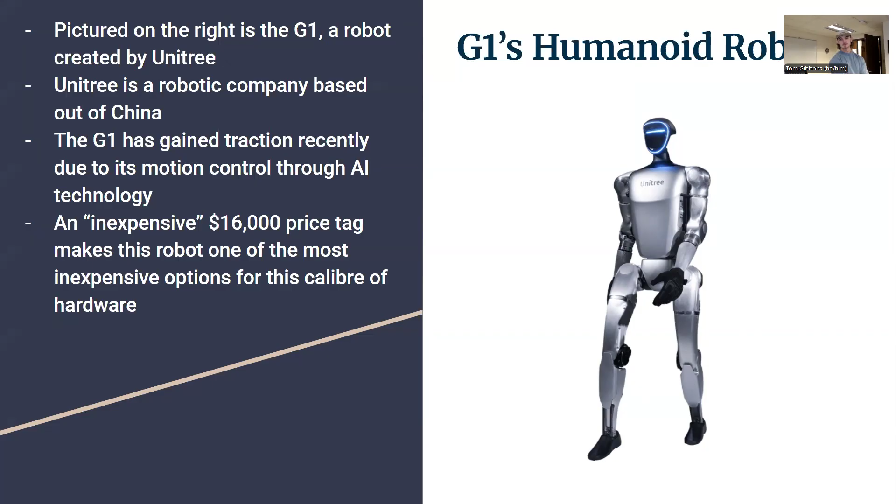The G1 has gained traction recently due to its motion control through AI technology. An inexpensive 16,000 price tag makes this robot one of the most inexpensive options for this caliber of hardware. There are some quotes there too, because 16 grand is obviously not inexpensive, but for a very sleek, functional humanoid robot that could be in your house and perform tasks, it's fairly cheap.

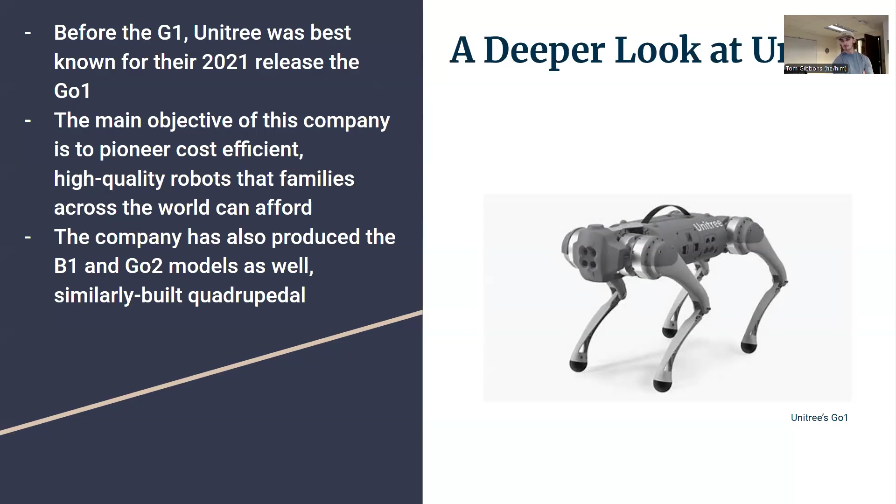Before the G1, Unitree's best known release was the Go1, this quadrupedal robot on the right. The main objective of the company as a whole is to pioneer cost efficient, high quality robots that families across the world can afford, bridging the gap between robots and affordability. The company has also produced B1 and Go2 models as well, which are similarly built quadrupedal, dog-like robots.

So the G1 was designed to be compact and light. It has 23 degrees of freedom, meaning that the robot has 23 different independent ways it can move. With these 23 degrees of freedom, it's able to walk, dance, and interact with its environment appropriately, able to navigate its surroundings.

So it's weighing in at about 40 pounds. If you can lift 40 pounds, you should have no problem carrying him around wherever you want, maybe to the park or maybe to grandma's house. He's 33 inches tall. Once again, he has 23 degrees of freedom, 7 of those degrees of freedom are within his arms, so he has a lot of motion in his arms. And then he has vision-based AI sensors. Once again, he costs around $16,000.

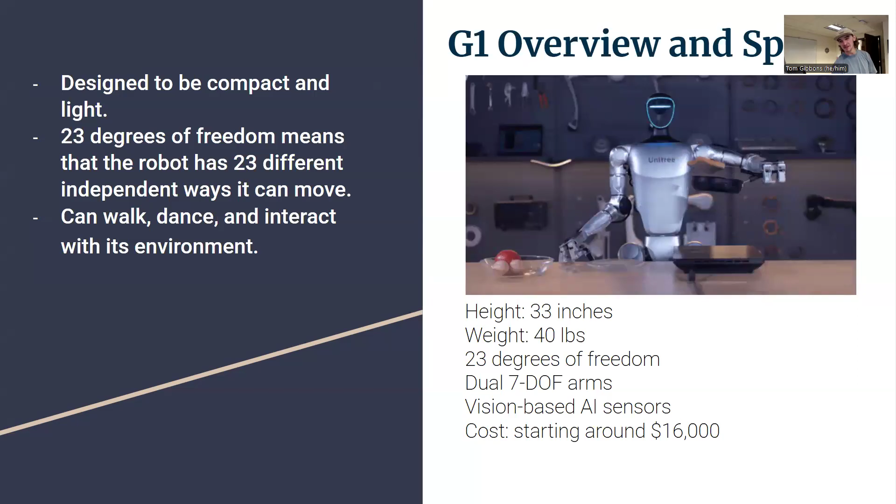33 inches tall, that's what we found online. Yeah, there's no way that's right because he's about human height. So yeah, he's got to be probably... yeah, that's completely wrong. He's got to be definitely taller than 33 inches.

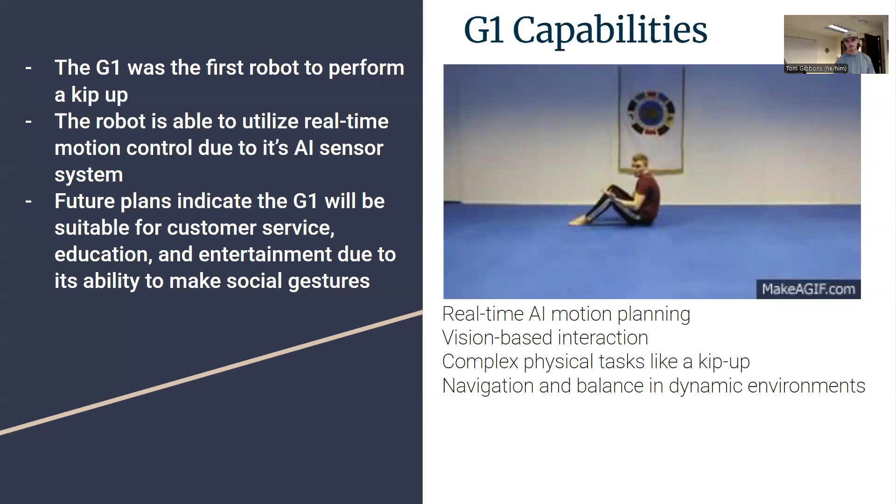One of its landmark features was that it was the first robot able to perform a kip up, which is this action being performed over here. It was able to do this because it could utilize real-time motion control because of its AI sensor system. Future plans indicate that the G1 will be able to be used for things like customer service, assisting in educational settings, and entertainment due to its ability to make social gestures.

I guess additionally to the kip up, they were testing it and able to kick it in the back really hard, and it's able to recover without falling over. So I thought that was pretty cool.

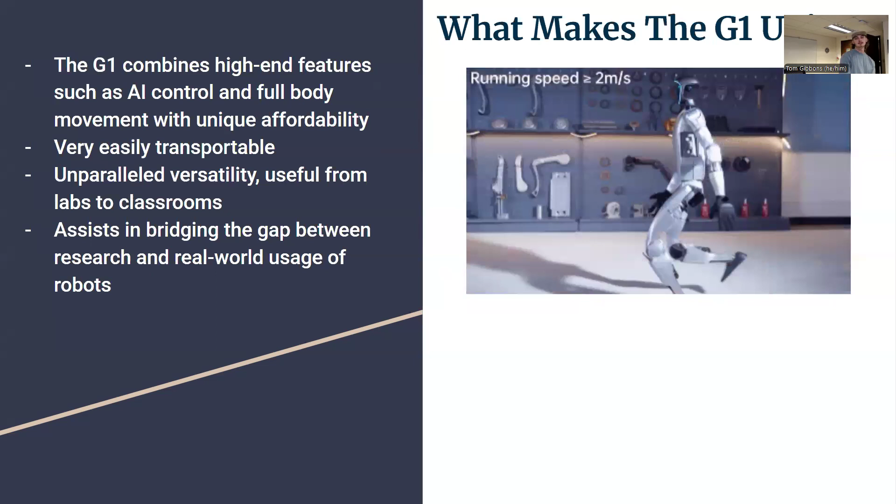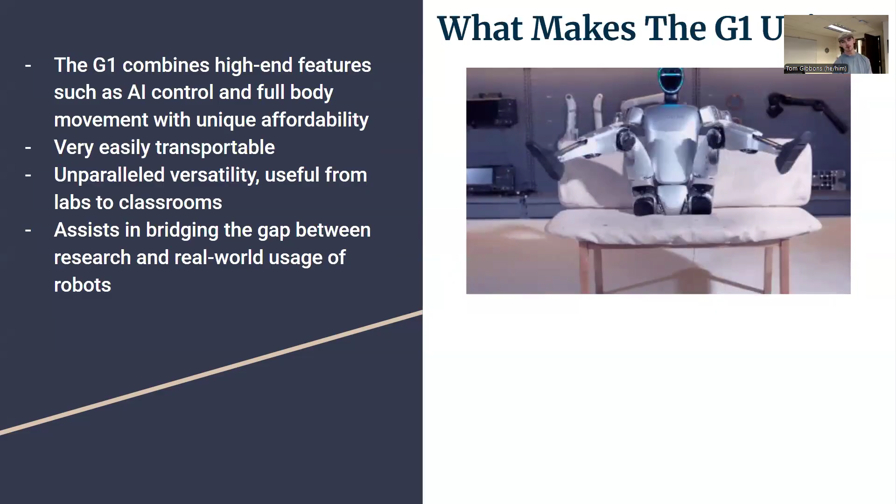So moving on to what makes the G1 unique. The G1 combines high-end features such as AI control and full body movement with unique affordability. It's very easily transportable, pretty light, and has unparalleled versatility, useful from labs to classrooms. If you were studying or coding or working with this in the classroom, it'd be easy to carry around.

And it assists in bridging the gap between research and real world usage of robots. So it's kind of affordable—we're maybe going to be able to have these in our own homes in the future.

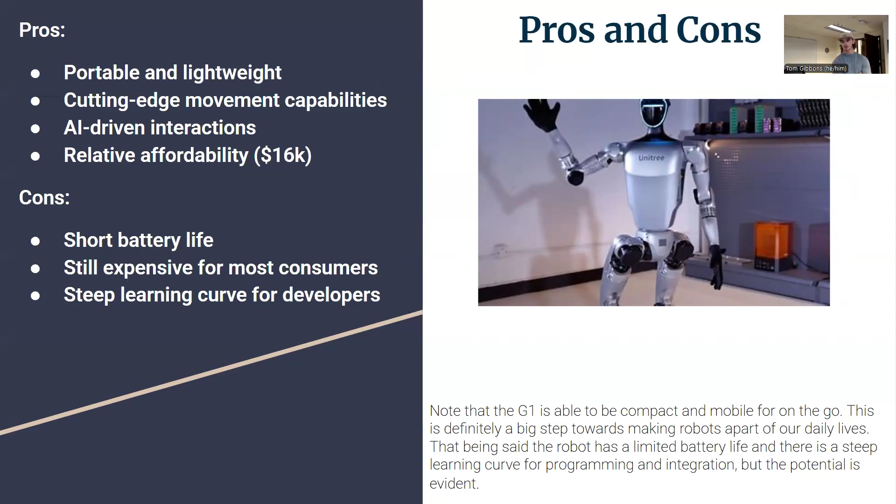The future of the G1: it can be utilized in the classroom as a teacher or teaching assistant. It can be used in nursing homes to help care for the elderly, potentially even as an at-home aid. It has potential capability to perform a wide variety of magic show-esque acts on stage, and it has huge potential in customer service and automation of human interaction.

To wrap up our thoughts here, we think that the G1 is a great indicator of further developments in robot technology for the future. This technology marks a major advancement in making robots more accessible to general society. The G1 not only displays how much robots have advanced kinetically, but how far humankind has come in its attempts to replicate itself in a repeatable, efficient, and effective manner.

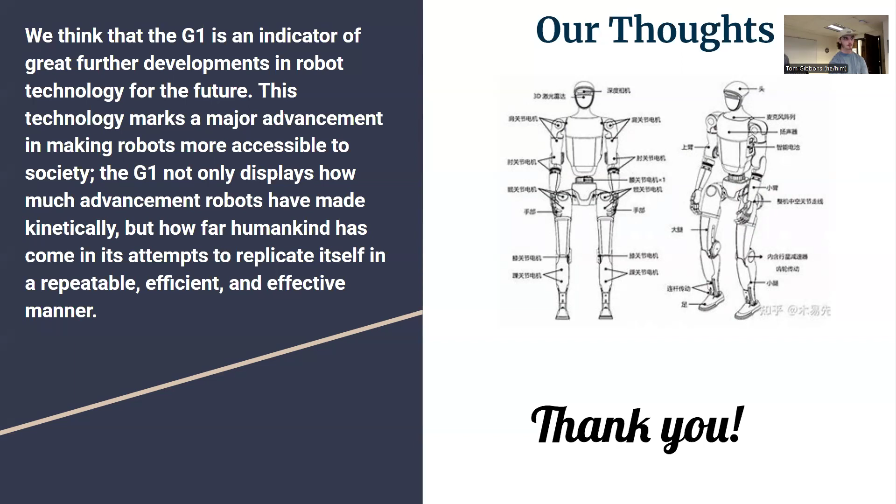Any questions? We got questions? What did you say? Just short—we just said it, yeah, I guess we didn't get into that. We just saw that it was short. That was one of the complaints that we found. It's short, apparently. Okay, questions? Now, someone has to ask a question or else we can't go on to the next one. Rule. Throw us a question—what do you got? Yeah, there we go. Oh, that's actually a hard question because absolutely not. No. Thank you. All right.

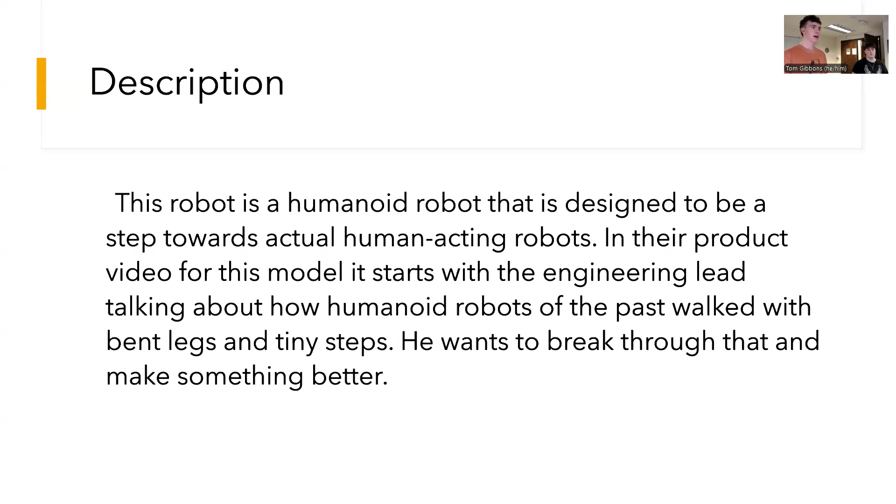All right, so our robot is this SE01 from EngineAI, another humanoid robot. This is a humanoid robot designed to be a step towards actual human acting robots. In their product video, it starts with the engineering lead talking about how humanoid robots have not been great in the past in terms of their actual behaviors—for example, bent legs and tiny steps. So a big focus for them was actual human behavior and performance.

The characteristics of this robot: it costs $12,000, which is considered pretty affordable for a humanoid robot—I think the last one was $16,000. The goal was to make it like the average height and weight of a human, so it's 5'7", weighing 121 pounds. So it is a little heavier, but it's very much so human. And it's got 32 degrees of freedom, meaning 32 independent movements.

A lot of those are in the legs and arms—each hand has 6 degrees of freedom and each arm has 4 degrees of freedom, so it can move and grab things. It can walk up to 2 meters per second, which is pretty fast, especially for the humanoid feature of the walk—we'll have a video at the end showing it. It operates approximately 2 hours on a single charge, which is pretty good, and they have a quick charge battery system, so it's easy to recharge. It's built from aerospace grade aluminum alloy, so it's very durable.

So the company Engine AI is a Chinese company based in Shenzhen. It was established in October 2023 and specializes in general intelligent robots and industry scenario solutions, including humanoid robots and related products. The products target various scenarios like scientific research, industrial manufacturing, commercial services, and household use, striving to promote commercialization and global deployment of humanoid robot technology.

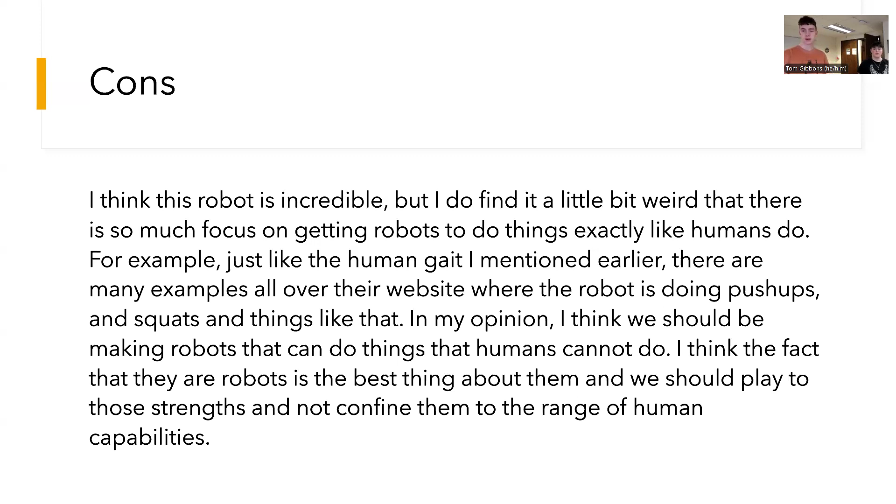Now the cons - this is a paragraph I wrote, more on a theoretical level. Sometimes robots can be built to act too much like humans, when I think the benefit of robots is that they can do things humans can't. So while the human-like gait is impressive, I wonder if that's what we should be focusing on for robotics. But still, it's a great engineering achievement and progress towards other things as well.

And we have a video of it here so you can see how it moves.

Hello everyone, today we're going to present about Figure 2. Before we get deep into this, something I found even yesterday - I don't know if everyone has watched the movie called Real Steel. There's a podcast of the owner of this company, and we'll talk about him a bit more, but he based his ideas to make the robot on that movie. I thought that was pretty cool.

Let's start. First, in terms of overview, the name of the robot is the Figure 2, and the company that launched this robot is Figure. Figure is finally bringing robots into the home. Figure is putting learning robots into the global workforce. Figure is taking an AI-first approach to market. This is the first thing you find whenever you log into Figure AI's website, and I think it's pretty nice.

Okay, so getting a little bit into what Figure AI is as a company, what they're bringing into the market, and what they're looking into for the future.

One of the things is Figure is bringing robots home, but I think their main focus right now is the mission that is here: build a general purpose humanoid robot that can eliminate the need for unsafe and undesirable jobs. We're going to continue talking more about who they're partnering with.

One of them is BMW. It's really interesting, I think Aaron is going to talk about it later. Figure AI was founded in 2022 by Brett Adcock. This was 2022, three years ago, and they already have two robots. So what can they do in 10 years?

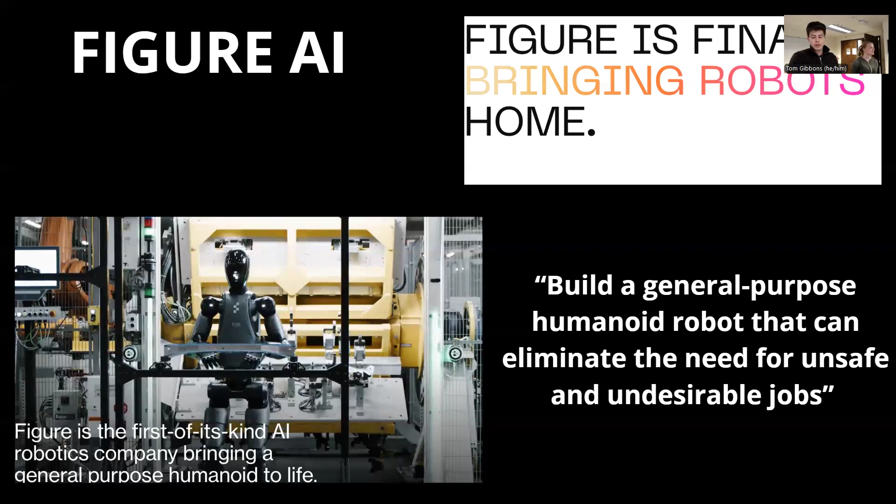So some of the key products: the first one is the Figure 01. This was launched in 2023. I see this mainly as a test of the company. They were able to launch this with less than a year of production, which was really fast. Some of the key things about it, they were trying to test how the robot's going to work, how it's going to move, but it was pretty simple compared to the Figure 2 that is now—well, it's not in the market yet.

We were trying to find out if someone has bought this type of robot. I think we saw there's one person—we don't know the name, we don't know anything—but there's one person that has bought this robot.

But yeah, and then they're also right now working on the Figure 03. This image you have here is an AI generated image, asking ChatGPT how they think the Figure 03 is going to look. Based on the findings we have, they said that the Figure 03 is going to be more humanlike. I don't know what type of materials they're going to make the body out of, but they say it's going to look more like a human and walk more like a human.

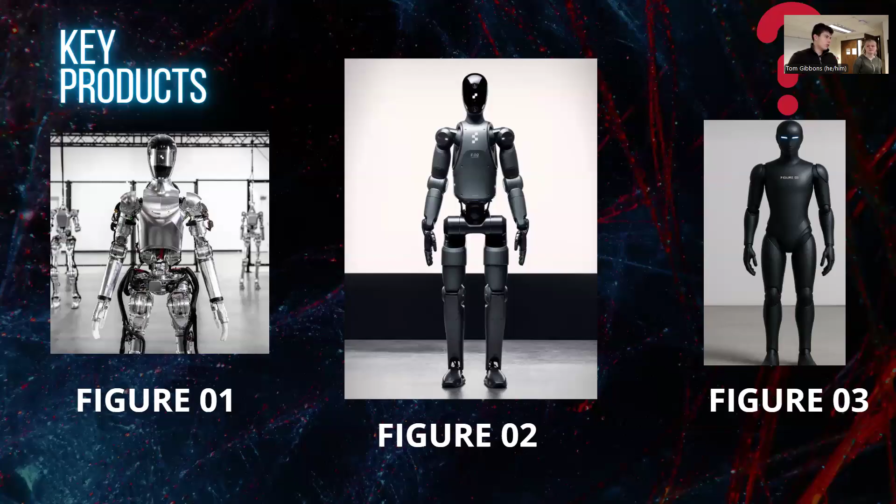Okay, in terms of costs, same thing—we tried to look at how much the actual price of this robot is going to be. We don't know, but analysts said it's going to be over $100,000. I think that's pretty crazy comparing to, for example, the G1 that you guys were talking about, which is only 16,000. That's not good. So that's why, with investors and everything, they're trying to cut that price to 20,000 to 50,000.

So some characteristics this robot has: it's 5'6", weighs about 154 pounds, so it's a little on the heavier side, but overall it has 41 degrees of freedom, and specifically in the hands alone it has 16 degrees of freedom, so it's able to move in 16 different unique ways in the hands. And then it also has speech capacity with AI.

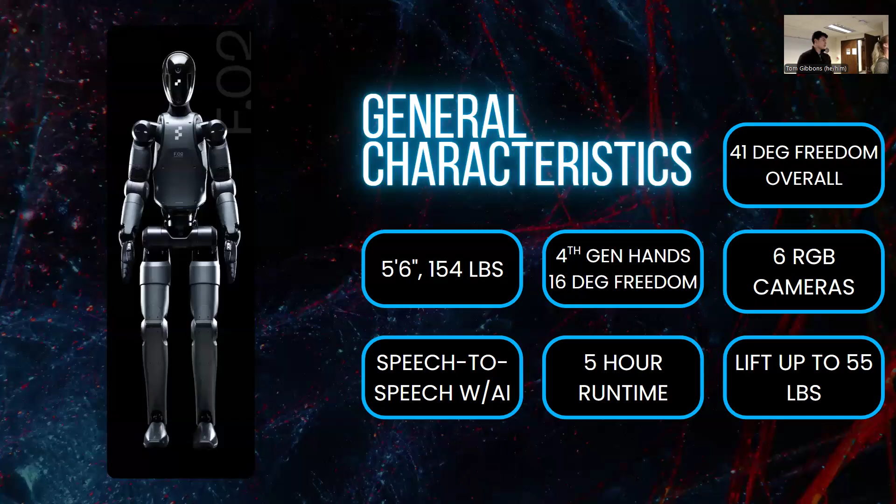They originally were collaborating with OpenAI, but then they shifted to their own Helix AI. It has a 5-hour runtime, so it's a bit longer than some of the other ones, and it also has 6 RGB cameras, and can carry up to 55 pounds. So a pretty decent amount there.

So something that makes it unique is that it's the first humanoid robot being used by BMW. Essentially, the task it's performing right now is putting on sheet metal, and they're overall testing it. BMW is partnering with Figure to test them out and see if they're compatible in an industrial field.

Basically, the robot itself is designed for heavy labor—it's not just meant for typical household chores. It is designed to do heavy lifting. Some of the quotes here show about a 400% increase in task speed for BMW.

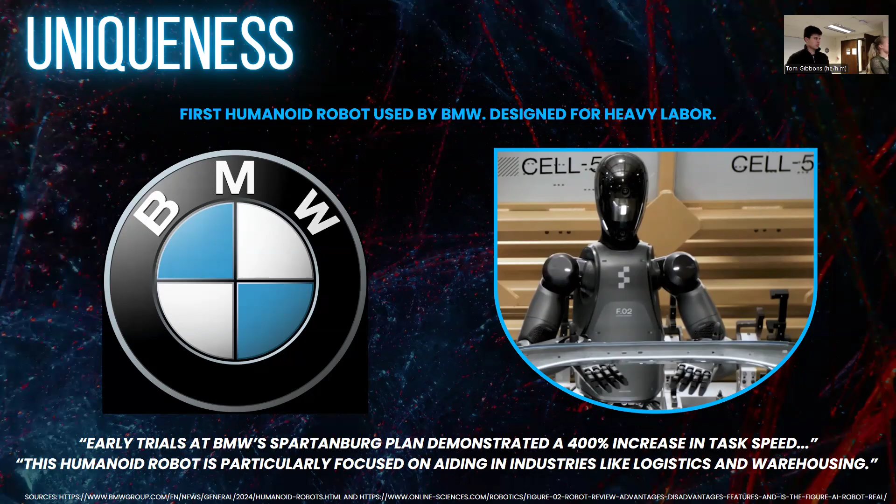And then yeah, just overall, it's one of the few robots that are aimed specifically at warehousing and stuff. So some of the pros is that I think it has a friendly design, I think it's kind of cute, it's just silly. But one of the things that I found really interesting was its ability to co-work with each other, so it's able to interact with each other.

So the image here was taken from a clip earlier, where they were assigned to put different foods into either the fridge or into the cabinets, and they were able to give each other the things that were needed to go into the correct locations.

Just overall versatility, so it's able to perform tasks such as this, but it's also able to be in the warehouse environment. And it isn't prone to chemical and temperature exposures, which makes it so sought after in the industrial field, just because if humans were exposed to those kinds of things, that could lead to a lot of harm.

And also it is capable of self-correction.

Cons, definitely on the costlier side for sure. Especially outside of household consumers, even for people who actually do work in warehousing and industrial fields, it's still expensive to actually equip yourself with a team full of those. But definitely a double-edged sword for jobs, because it is helping to try and take away heavy labor, which could lead to many strains and pains, and that overall unsafe environment with chemicals and stuff. But at the same time, it is also helping to remove people from that kind of environment.

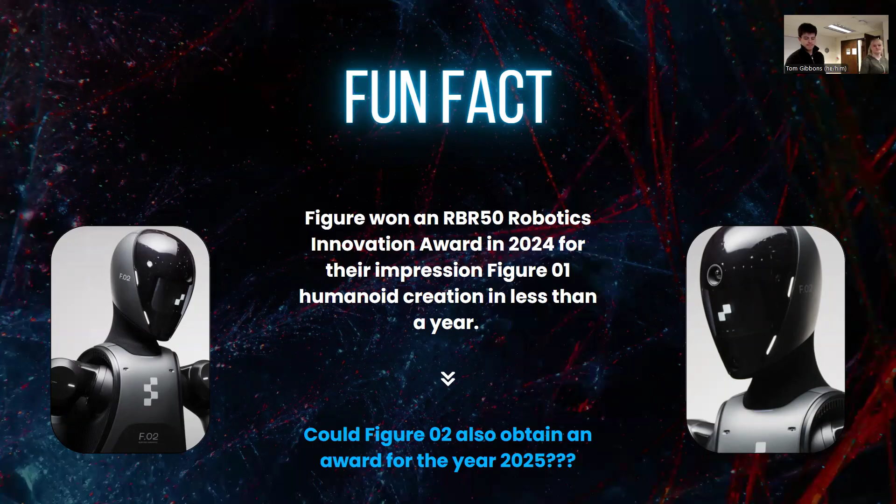What exactly is it doing for BMW again? So it's putting on sheet metal plates. They'll carry them over and put them in the correct spots right now. They're keeping it relatively simple for now, just because they're trying to test it a lot and see how compatible they are and how they're able to perform those kinds of tasks. But yeah, they're helping with making the cars slightly, but it's really interesting.

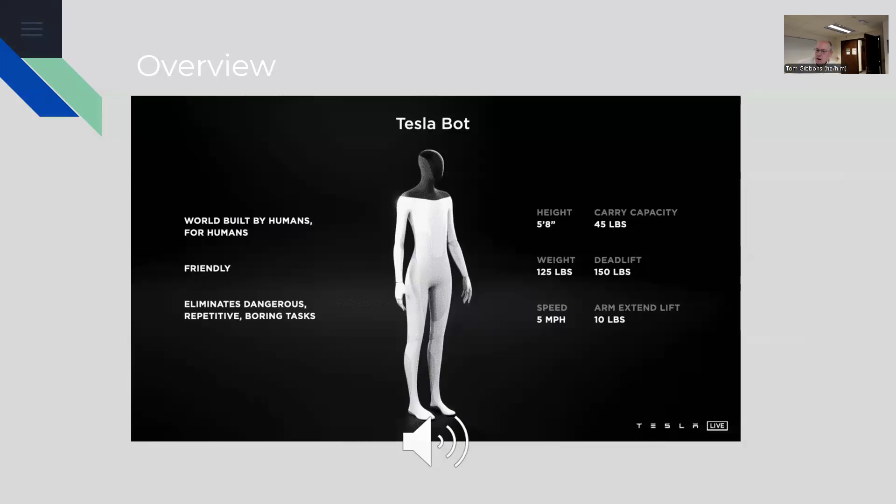Most of you likely know Tesla for electric vehicles, but under Elon Musk's leadership they've expanded into multiple technologies. The company's stated mission is to accelerate the transition away from fossil fuels, and robotics is now part of their innovation ecosystem.

The Optimus Gen 2 is the second of Tesla's robots, featuring significant improvements over the first generation. One of its most impressive characteristics is its enhanced dexterity, allowing it to perform complex tasks like folding laundry and packing meat. Design-wise, it features a minimalistic black faceplate and has a slimmer build compared to previous models, giving it a distinctive appearance that resembles characters from science fiction. Side note, Optimus Gen 2 was named after the main character in the Transformers series.

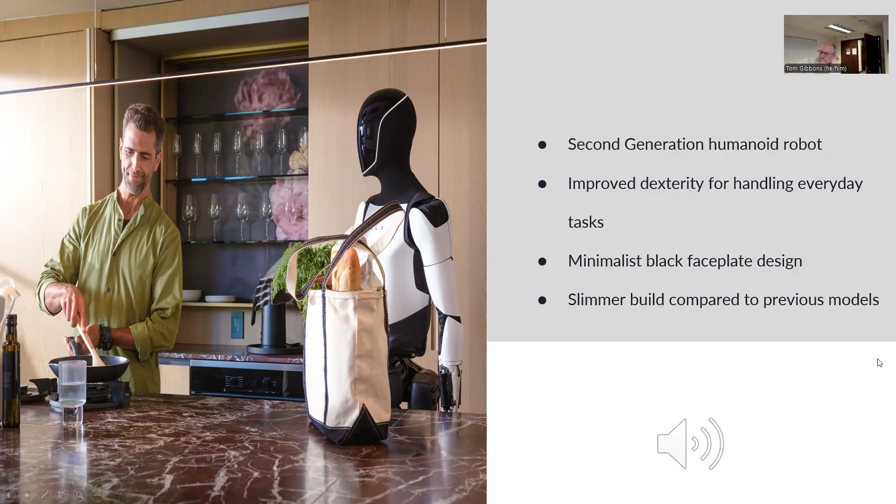The robot is powered by Tesla's proprietary neural network and advanced computer vision system, the same technology that supports their autonomous driving features. This gives the Optimus Gen 2 robot the ability to perceive its environment and interact with objects in a human-like manner. While specific technical specifications are not fully disclosed, the robot is designed for both household and industrial applications.

One thing I'd be interested to see, and I don't know if she mentioned this, but she has a picture of it - it has not only degrees of freedom in the hand, but also touch sensors. You can see it has touch pads on the fingers, so you can see where it's getting feedback for how hard it's pushing. It'll be interesting to see if others have similar sensors elsewhere.

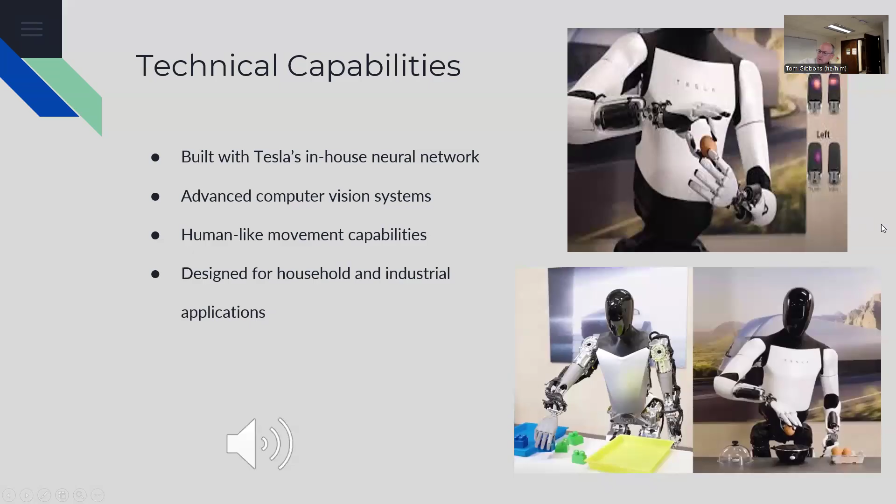Cost and availability. According to Elon Musk, the Optimus Gen 2 is expected to cost between $20,000 and $30,000, making it potentially more accessible than other advanced humanoid robots on the market. However, Tesla has not announced an official release date yet, so it's unclear when consumers or businesses will be able to purchase one.

I like 'according to Elon Musk' for the price, because in my world, anytime you do that, you always double the cost and double the amount of time, because he always underestimates the cost and underestimates how quickly it'll arrive. So, cost and availability, okay, thanks.

What makes this robot particularly impressive is its dexterity at such an early stage of development. The ability to manipulate objects with precision is one of the hardest challenges in robotics. Its distinctive, minimalistic design is also appealing from an aesthetic perspective. Furthermore, being built on Tesla's existing AI and computer vision expertise gives it a strong technological foundation that many competitors lack.

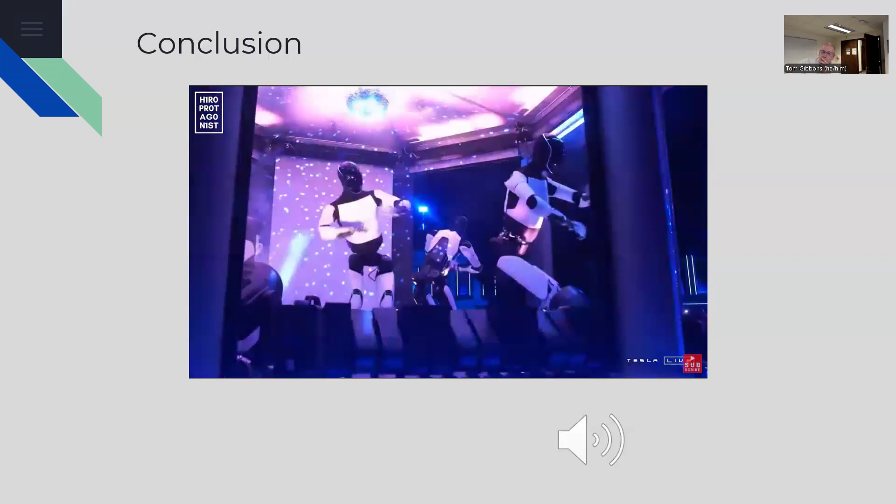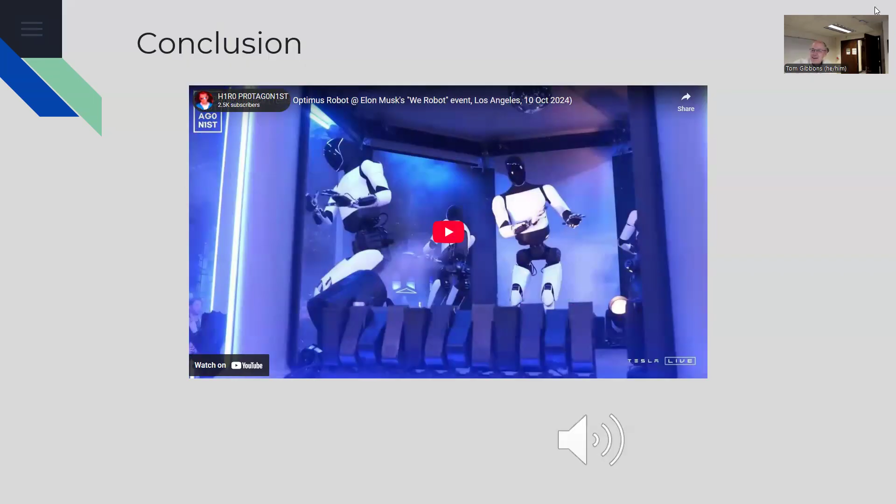Okay, that was very exciting. Uh, all right.

They mentioned the Boston Dynamics one is their main competitor, so why don't we do that next up here. Atlas. So yeah, we'll do the Boston Dynamics Atlas robot.

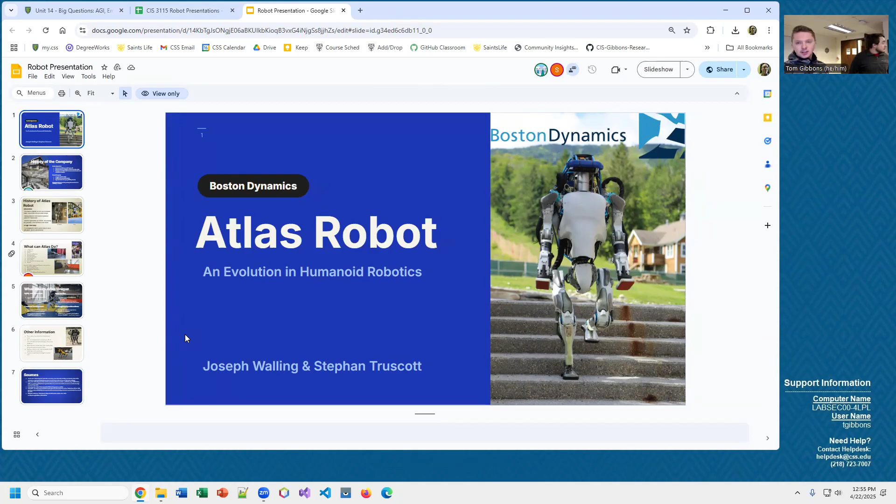A little history of the company. Originally founded in 1992 as an MIT spinoff, it's headquartered in Waltham, Massachusetts, and employs over 1,000 staff members. It has a list of famous companies as its parent company. They're probably best known for Spot, their robotic canine, which is in wide market adoption.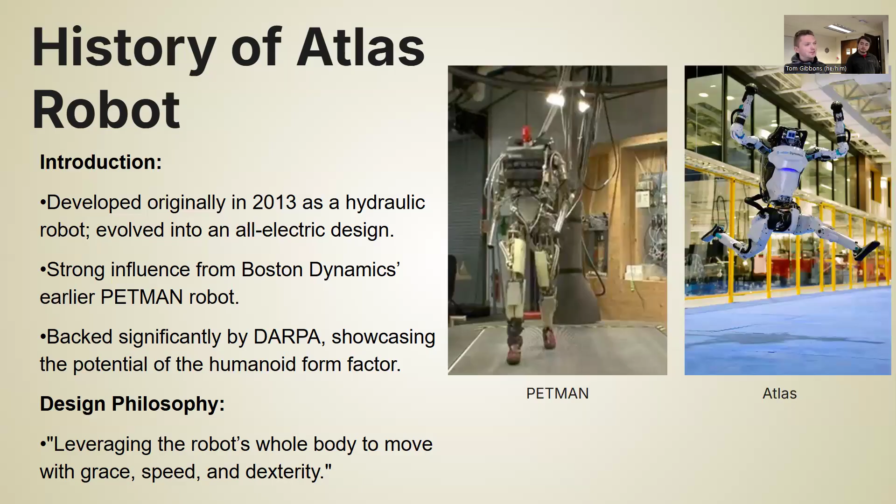Just some things that Atlas can do and about the robot. It's about 5 feet tall. The newest version of it is fully electric; it used to be hydraulic. It's got 28 degrees of freedom. It has been shown to be very agile and dexterous. It can run and do flips and stuff. It's got a 360-degree swivel.

Stereo cameras and a laser rangefinder, so it's got pretty good depth perception and stuff.

There was a video of it sorting car parts, so it can lift a 35-pound car strut. It's also been shown to do push-ups. And like one of the previous robots had the pads on the hands, and I think this one does too.

In a 2015 competition, it was able to drive a utility vehicle, walk across some rubble, use doors and tools, and it was able to connect a fire hose and open and close valves. I'll show that video now.

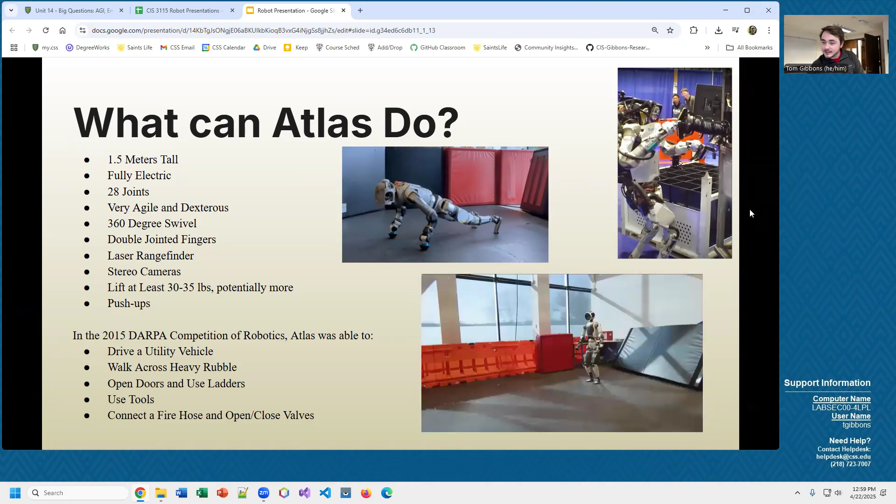So what makes Atlas unique is agility and movement. It has, as you've seen from the video, really good movement, super agile. It can do backflips as well.

Continual development over a decade. In this development process, it has gone through a range of iterations. What we like about it is unparalleled movement capabilities, as well as coordination and grace, far exceeding normal robotic performance.

Challenges: it's primarily a demonstration project. It has no real immediate market purpose as of right now, and has unclear long-term application goals for this robot.

Again, it's not actually on the market, it's just a demo right now. But the total cost of development over the years is probably in the millions to tens of millions. A lot of it was supported by DARPA, the research division of the Department of Defense.

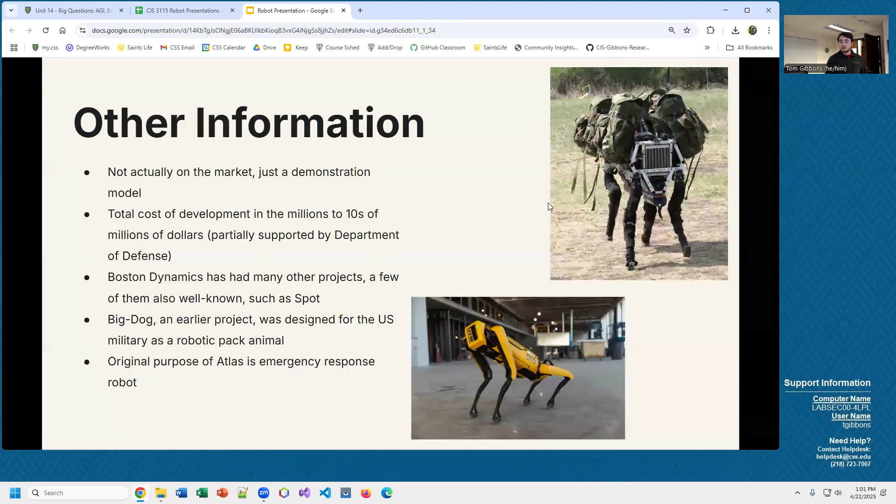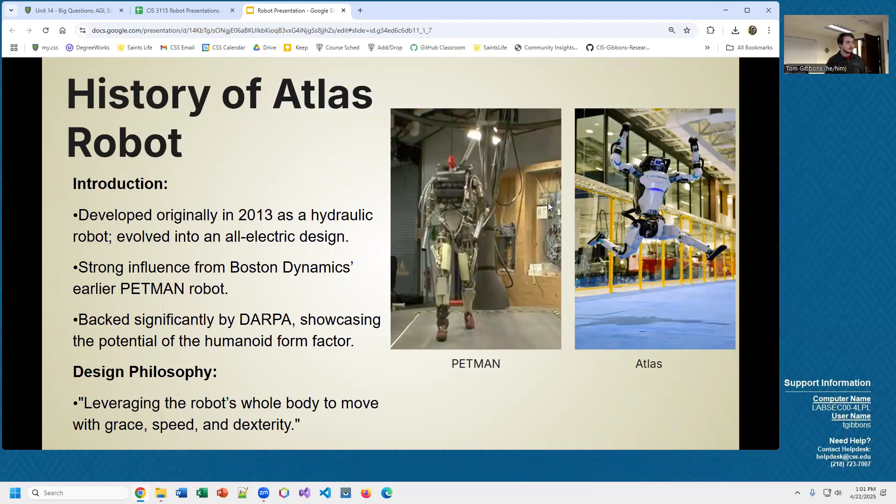I find this interesting because, especially if you were at all in high school robotics, there are two main ways of driving robots. One is hydraulics, where you have pipes and you're sending hydraulic fluid or air pressure through these tubes to drive actuators and stuff like that. There are some advantages, but a lot of disadvantages to that sort of system sometimes. Nowadays we often have very strong electric motors and do that instead.

One thing that's interesting to watch is that there are two options with electric motors. One is to have the actual electric motor or servo right there in the joint that drives it. The other is to have a bigger electric motor somewhere else, like in the body, and then run a cable out to pull it, and that lets you make things go up and down.

That's similar to old classic mechanical machines, which were often cable driven because the motors weren't small enough. Biology often works that way too, where there's a tendon connected to something else that pulls it, and pulling on that tendon can move something.

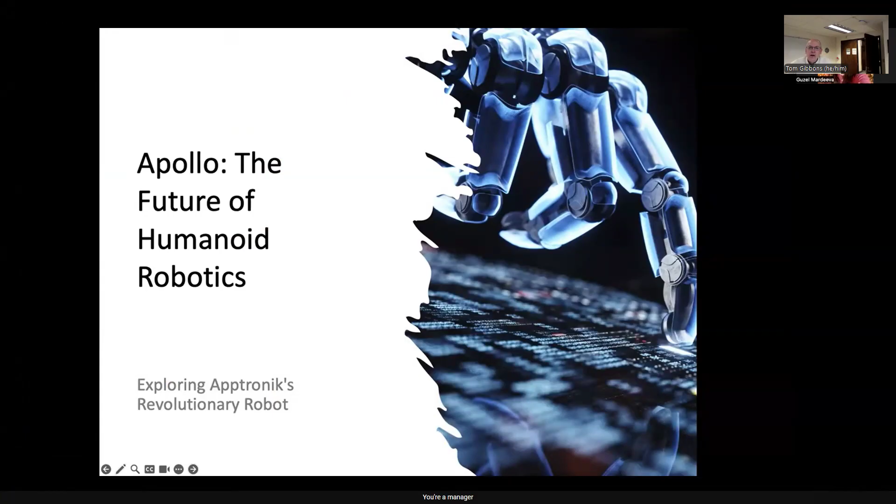Apollo was created by the company called Apptronik. Apptronik is a robotics company based in Austin, Texas. It was founded in 2016 and spun out of the University of Texas Human Centered Robotics Lab.

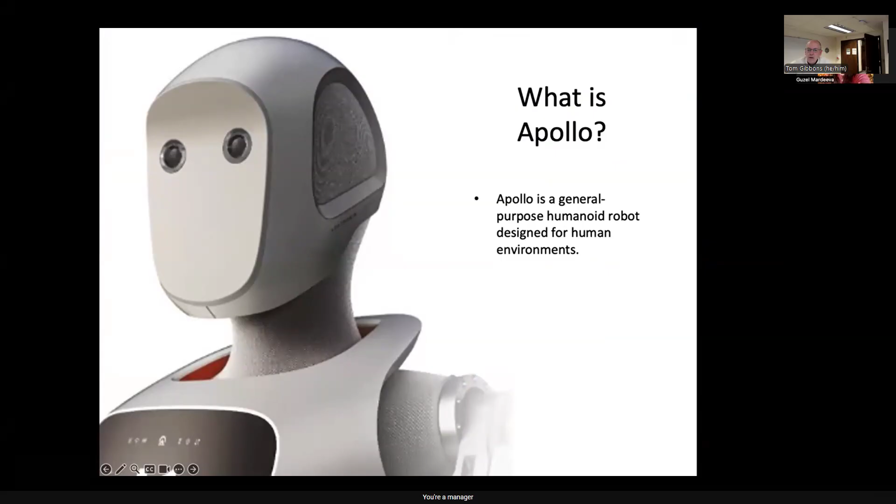Apollo is a human-centered, general-purpose humanoid robot. It's built to work safely and efficiently in spaces designed for humans, performing tasks across multiple industries. Apollo stands 5 feet 8 inches tall and weighs 160 pounds. It's designed for industrial use today, but with potential expansion into areas like healthcare and logistics.

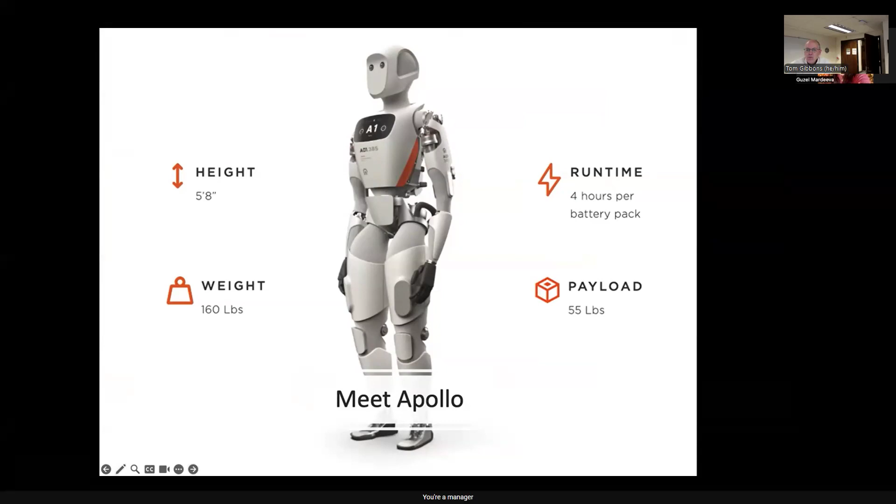Apollo has a payload capacity and about 4 hours of battery life. Its design includes force control mechanisms and LED indicators. Here's a video of Apollo in action.

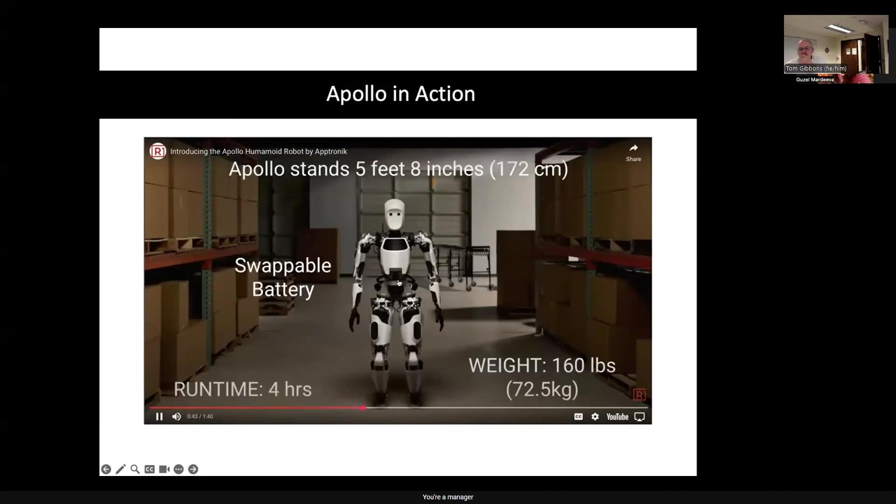Because it's designed with a human form in mind, its size and shape are similar to a person, which means it can move easily through spaces built for us, using our tools, equipment, and infrastructure without needing major changes. This also makes interacting with Apollo feel more natural.

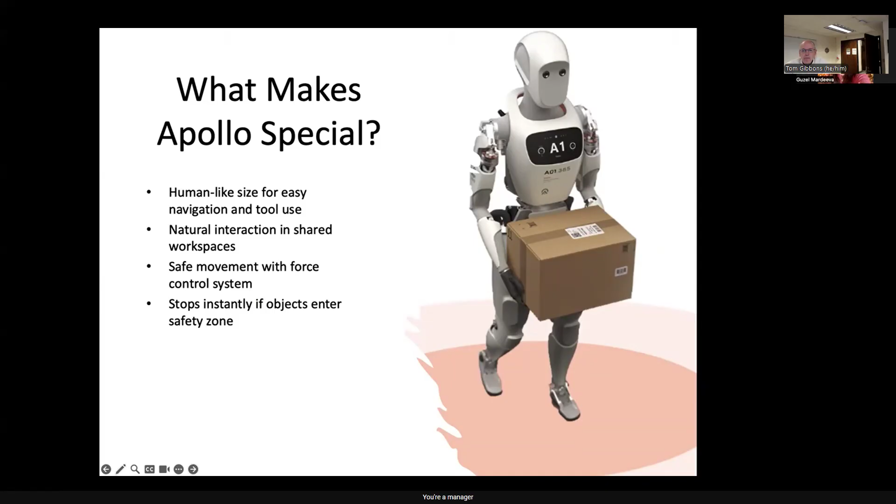Apptronik developed a unique force control system that allows Apollo to move safely around people. It can detect objects and its surroundings, and its behavior can be adjusted to create safety zones. For example, if a moving object enters its effect radius, Apollo will immediately pause its movements to avoid collision. This makes it a great fit for collaborative work environments where safety is a top priority.

But for now, Apptronik, like most humanoid manufacturers, is focused on industry. Factories and warehouses are a good first step, as corporations have the money and resources required for pilots. Scaling manufacturing for these robots will continue to drive the price point down, but as it stands, the systems are far too expensive for the home or even care facilities to be a practical option.

The long-term goal is to use it in healthcare and home services. Apptronik aims to price Apollo at $50,000 to make it viable for small and mid-sized businesses, but Apptronik isn't there yet.

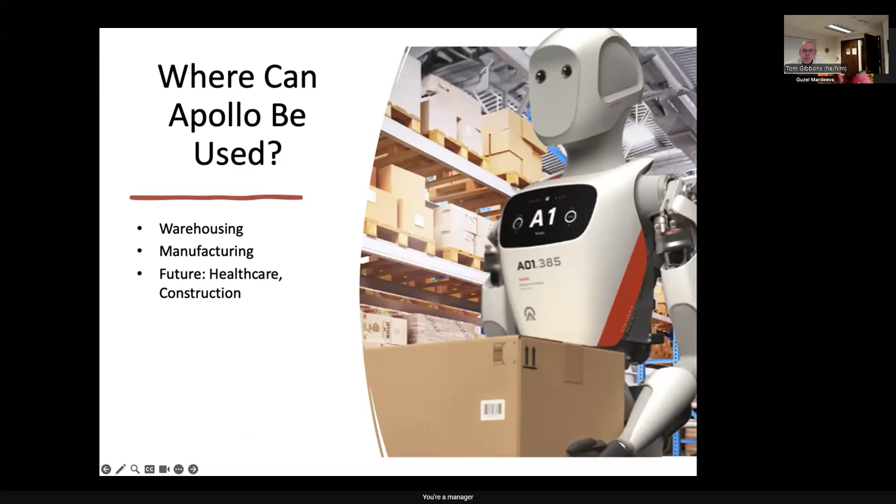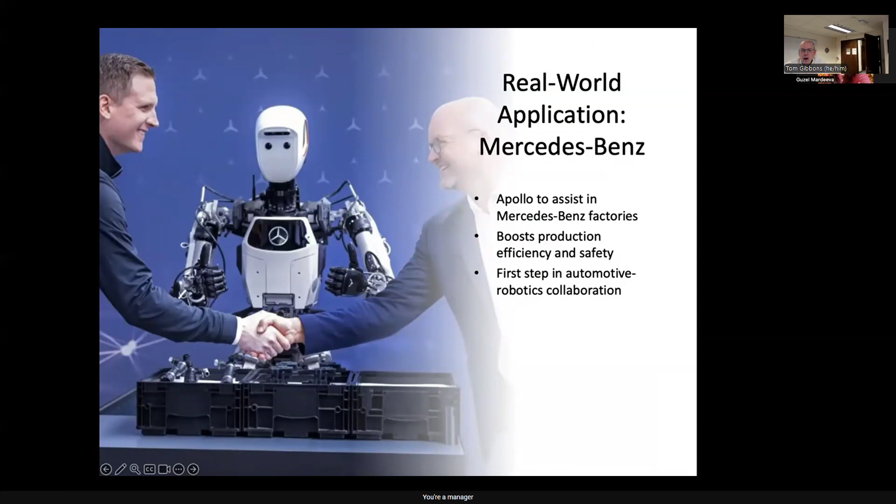Mercedes-Benz recently announced plans to use Apollo in its factory. The goal is to improve efficiency and maintain high safety standards in vehicle production. This real-world partnership shows how humanoid robots like Apollo have started to play a serious role in large-scale industry, and it could pave the way for even broader adoption across the automotive world.

While Apollo is a powerful and promising robot, it does have a few limitations. It still needs human guidance for more complex and unpredictable tasks, and it's best suited for controlled environments like factories. The battery lasts about 4 hours, so it needs to be swapped or recharged for longer shifts. Also, its hand precision isn't quite at the level of humans, especially for delicate work. Lastly, it's still in the early stages of real-world use, so large-scale results are limited for now.

Apollo represents more than just new technology. It is a stepping stone toward a future where humans and robots work side by side. With its human-like design, safety features, and growing real-world applications, Apollo shows how robotics can enhance our lives and industries without replacing the human touch.

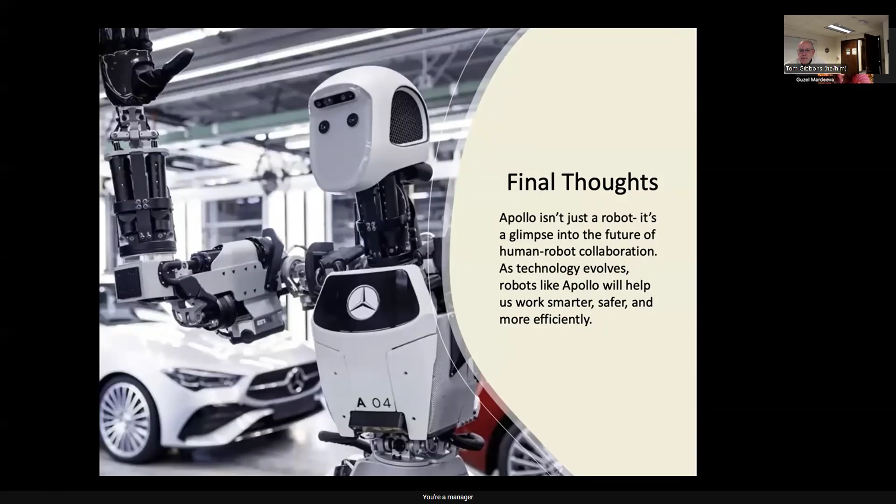Okay, yeah, so this is Clone Robotics. It's a Polish company, a bit more on the material science side of things. They're working towards making a humanoid android robot, which I think is going to be called the Proto Clone. They've got a few versions, but they don't really have a working one yet.

They did mention myofiber muscles, but on their website they don't say anything about it. And reading about them, I don't think they've got that working in any sort of way just yet.

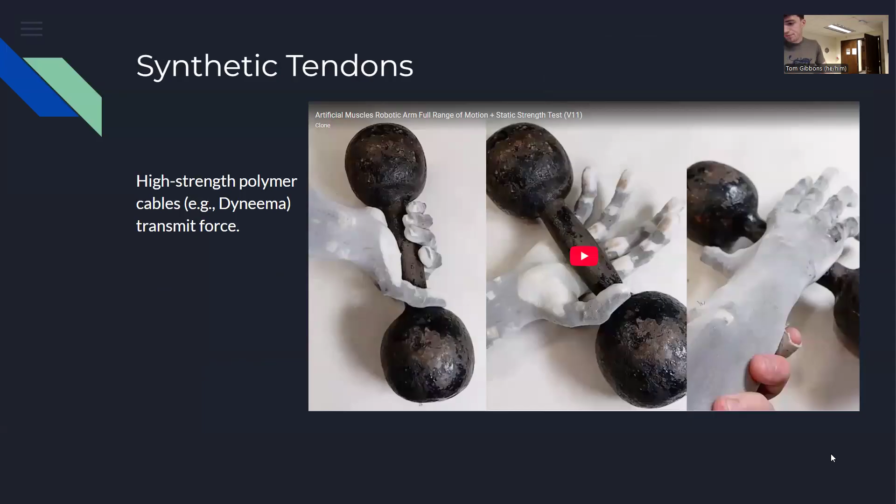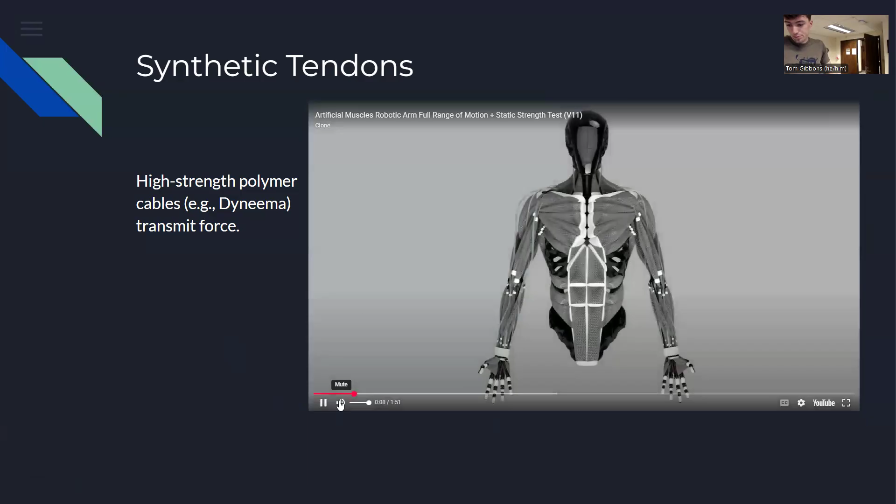And those muscles are linked to tendons, just like... oh, you can hear the air going there. It's sort of really modeled - if you look at your own hands, it's super similar to how they've done it there. So in terms of degrees of freedom, it's over 200. It's basically meant to be exactly like a human being.

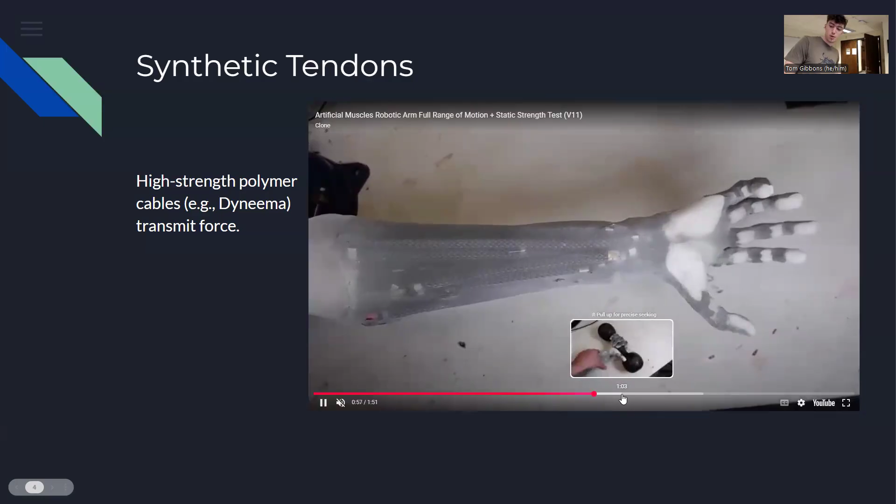So yeah, there's that, I don't think there's much more worth looking at here. That sort of comes with pros and cons - on one hand it's great, it should be able to fit right in like a human being, but on the other hand it's sort of limited in exactly the same ways.

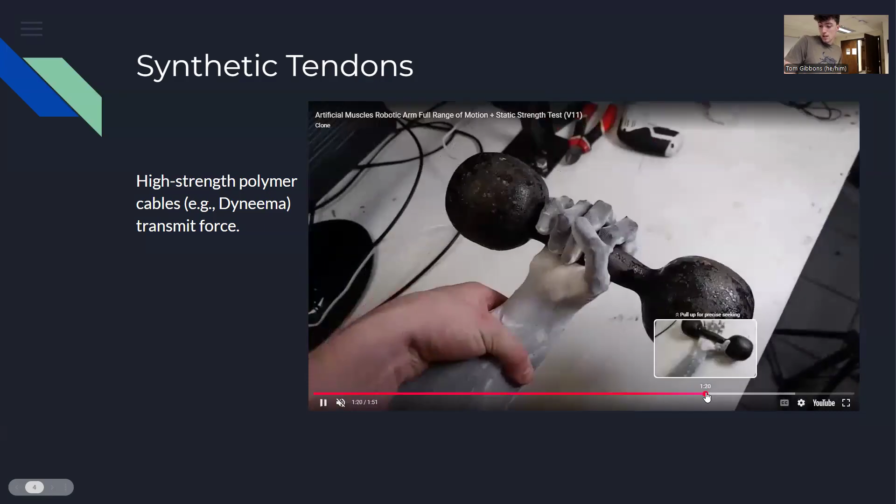This sort of links in with AI control. Again, they don't really have a lot of working models on their website. It still seems pretty theoretical at the moment, but they're planning on having a natural language interface, so you'll be able to speak to it and it will reply and take instruction, just like a human being. The AI will also control its actual senses and ability to not fall over and that sort of thing.

I think the reason it's going to be quite important or a bit of a game changer is because it's so like a human being, unlike some of the ones we've seen here where they're just chunks of metal moving around. It should be more suited to being safe around human beings - it's not going to be a single action movement, it'll be muscles that work against each other just like we have, so they're more dexterous. They should be nice and gentle and soft to touch, I guess.

Also, given they've made it exactly like a human being, it will be useful for researching human beings - like you'll be able to damage one muscle and see how it compensates, to study actual injured humans. And in terms of actual applications, the fact it's so much like a human means it should be able to fit right in without any adaptations to the workplace, which, as Johnny said, is good and bad - you're not really improving the human by very much.

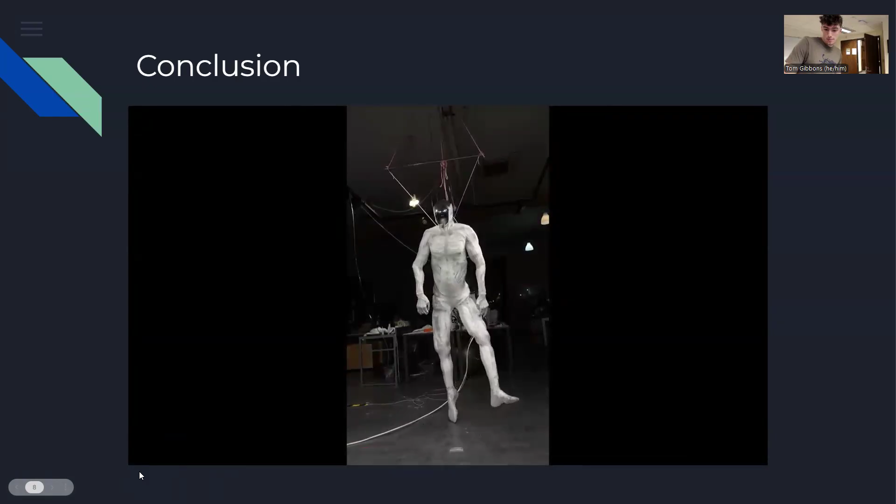This is a little video of a full body one here. You can see it's quite freaky - it's really human-like, not very functional. The music doesn't help, but it's quite eerie. You can imagine if that actually worked a bit better - it looks very like a human, it's a bit freaky, the feet and the joints and things like that. They said they have to put a mask on it to try and stop that uncanny valley effect of something that's almost human that's not quite.

So that's the Clone Android V1. That's pretty much all I have to say about that. My sources are here - this one, source three, has some information about way more advanced artificial muscles, which I don't think is what they've used in their prototypes, but it's pretty interesting. It seems that they're making actual muscles that will work like human muscles rather than air sacs. Yeah, I think that's pretty much it.

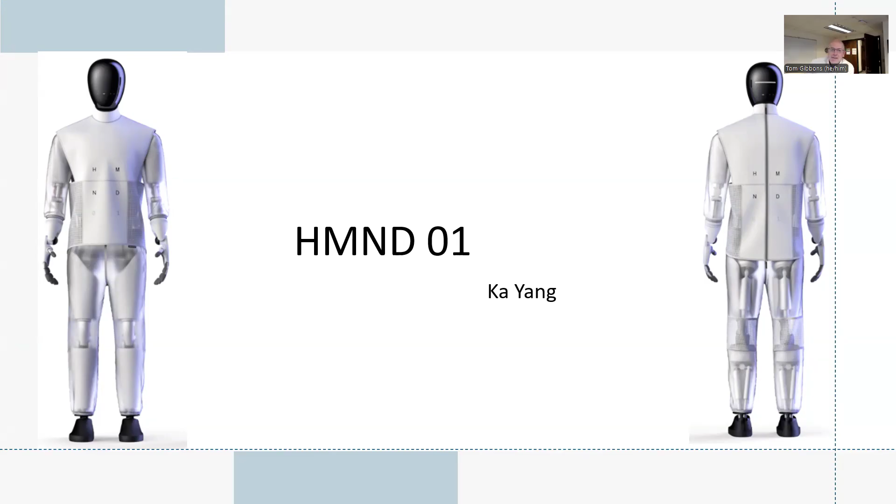Hi, my name is Ka, and it's called HMND. The HMND-01 is a new humanoid bot made by a company called Humanoid.

It is built to work with people, not to take their job. It's about the size of an average adult, standing 5 feet 9 inches tall and weighing around 154 pounds. The idea is that it can help out in places like warehouses.

It can also carry up to 33 pounds, which is enough for many basic jobs like moving boxes, stocking shelves, or handling parts in a factory. It uses smart AI to move through tight spaces and do tasks carefully and accurately.

One of the coolest things about HMND01 is that it is modular. That means you can switch out parts, like its arm or tool, depending on what job it needs to do. It also has changeable outer covering so it can work in different environments, like a clean store or a dusty warehouse.

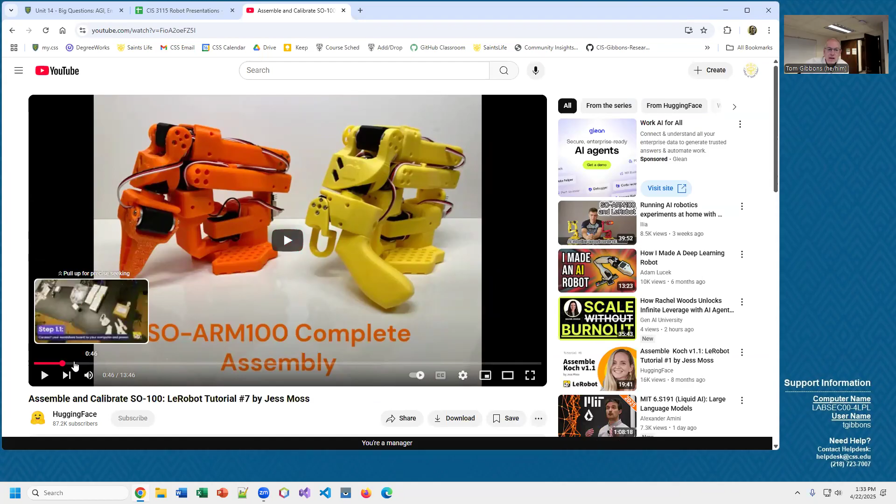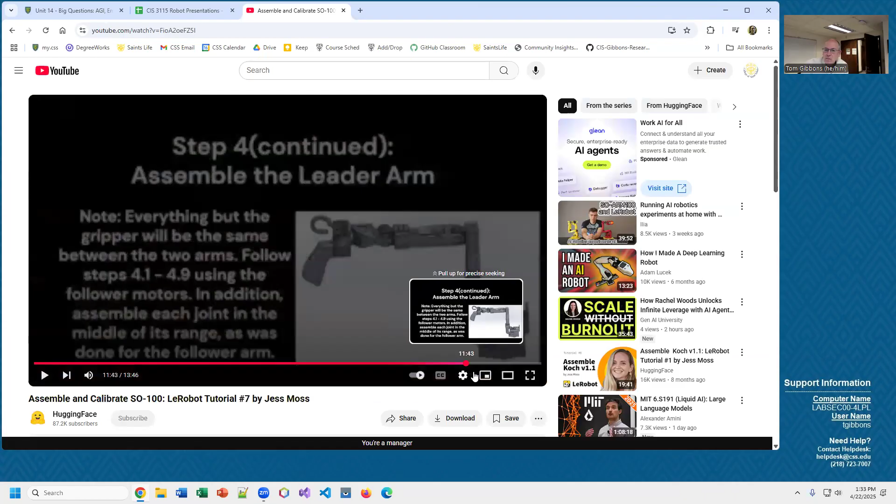This is someone who built this, but it's a little robot, again built with servos and stuff, and it runs this AI. Let me get to there. Okay.

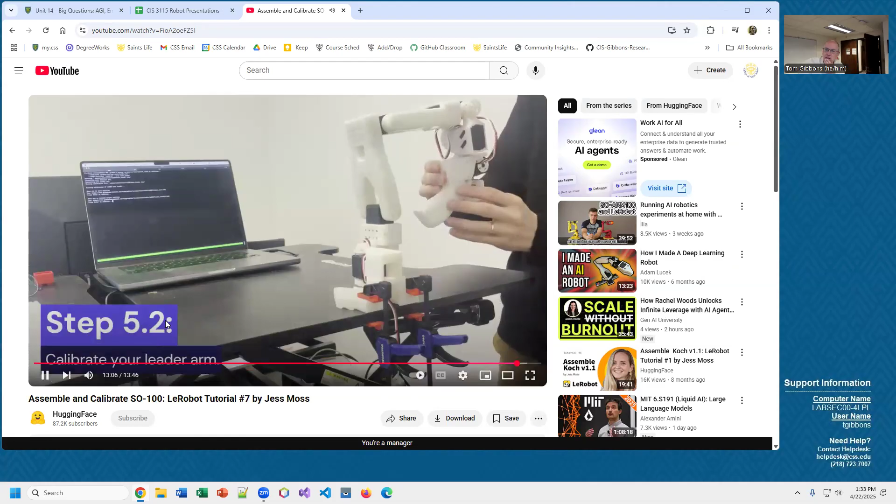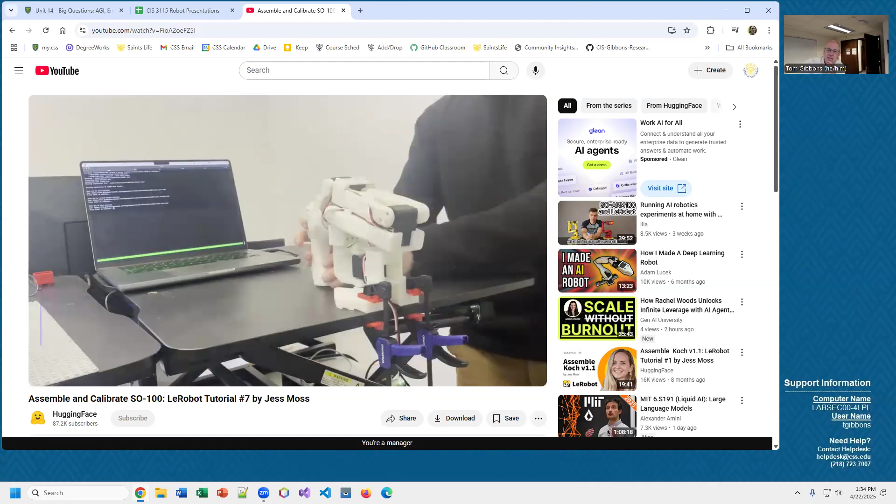You can try to program it to do things, but the real power comes in, it's really hard, challenging sometimes to program all these motions. The real interesting things are when you show it, you train it with another thing. You use this object, and then you have one version of it that you move around to grab things, and then it learns, it runs neural networks, and will learn how to train something else. Let's see if they can do this.

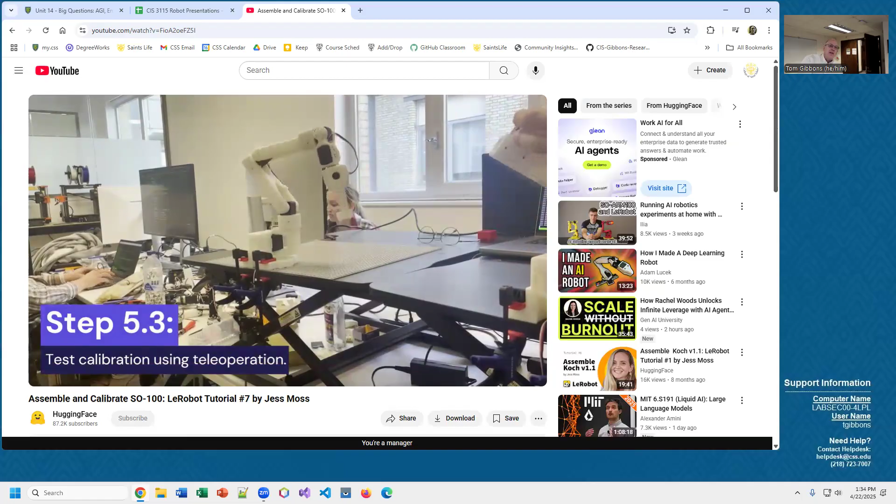As they're moving one, they're trying to pick up something. They're operating one arm to pick up another. Similarly, you have to do it like 50 times, but within 50 times it can learn to do these sorts of tasks.

I saw one version where now they have a language model, so you program a prompt, and it learns those prompts so that eventually you can just tell it to do things and it'll do it, sort of stuff. I'm hoping maybe next year to be able to work with something like that, because I don't have $30,000 to buy an actual standing robot yet.